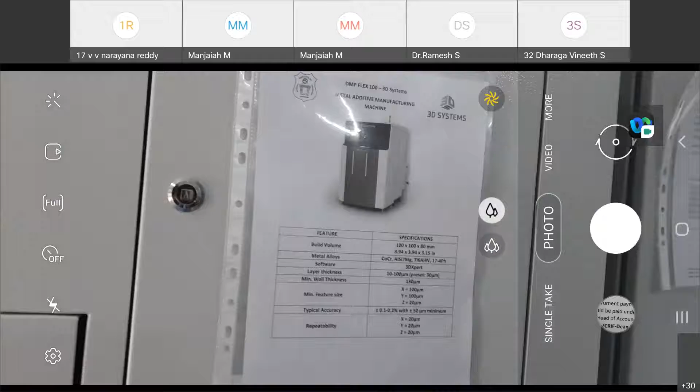So this is a 3D Systems DMP Flex 100 we are having here. The specification of the machine is the build volume is 100. The materials here are aluminum, titanium 6 aluminum 4 vanadium, and 17-4 PH, and the software we are using here for making a part and slicing is 3DXpert. The layer thickness, whatever.

There is some voice issue. Please check it, Rakesh. Last one. Is it? Hello? Yeah. Is it audible, sir? It's fine now. Sir, is it audible? It's audible. Fine. Go ahead.

Okay, so the specifications I already explained a little bit. The minimum wall thickness we can produce using this machine is 150 microns, and the typical accuracy is plus or minus 50 microns. We can produce with the help of this machine, and also we can use any type of material. These are just the 4 materials I mentioned here.

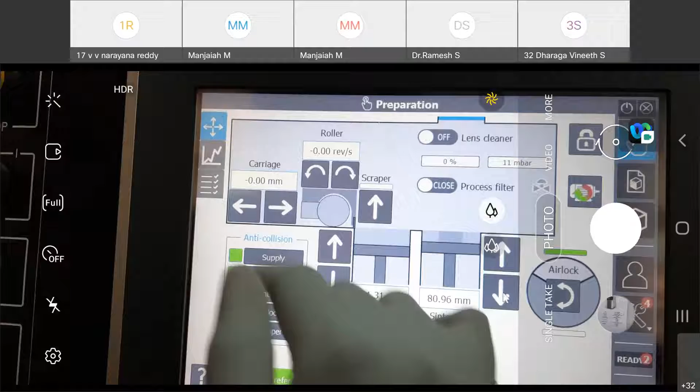Here the green color is indicating that everything is good. If it shows orange or red, it is having some error, and we need to understand and rectify it. All these are the different supply, carrier, centering, airlock, scraper movements specified here. This is the supply piston movement, and these up and down arrows indicate the centering piston movement. All those things we can control with the help of this screen. The screen is very user friendly and anyone can easily operate this metal 3D printer which we are having here.

Now I am going to open this metal 3D printer. This is the lock. Right now it was locked. I want to open this system, so I need to unlock this one. There is a column here. This is unlocked. Now I am opening this machine. This is the opening of the machine.

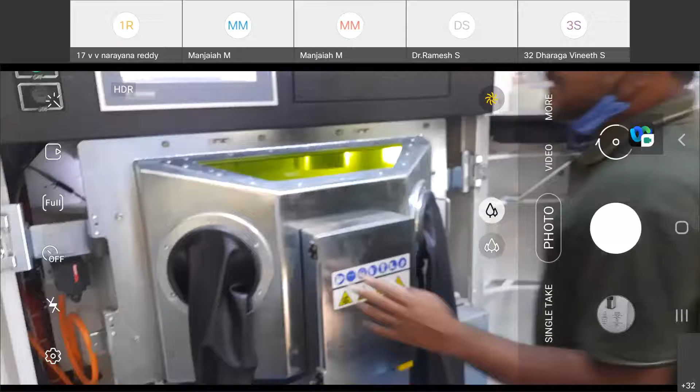Now when you are opening this machine, there is a glove box. The two glove box ports are there. These glove box ports are used to operate inside the chamber. With the help of these glove boxes, we can access the inside chamber of a metal 3D printer, which was shown very clearly. Now I'm going to access this printer.

Before that, I'm opening one more. This is a door we have to send any material. With the help of this, we'll place the build plate, powder, everything we can send through this chamber. We don't have any extra ports. To supply any material or build plate, screws or whatever things are required to operate the inside chamber, those things will be placed inside here, and we'll close this.

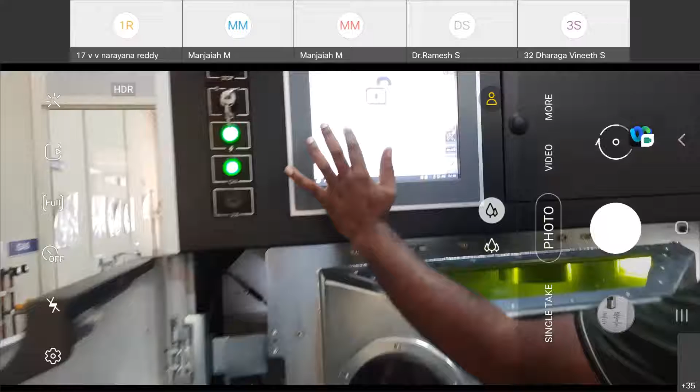Like this, and I'm going to open the chamber with the help of the right side glove port. See, the red color is indicating the door safety. There is a red color here which is indicating the door is not in safety. Left door is open, due to that reason we are getting red color. Because the right door is also open, it shows this red color.

Now I'm going to open the right port. It will come to red color, which means it is not in the safe condition, so we don't need to operate the machine. Now I open the right port. Inside we can see here, it is called a supply piston, where we already poured some amount of powder. That is aluminum 10 silicon powder we are using right now.

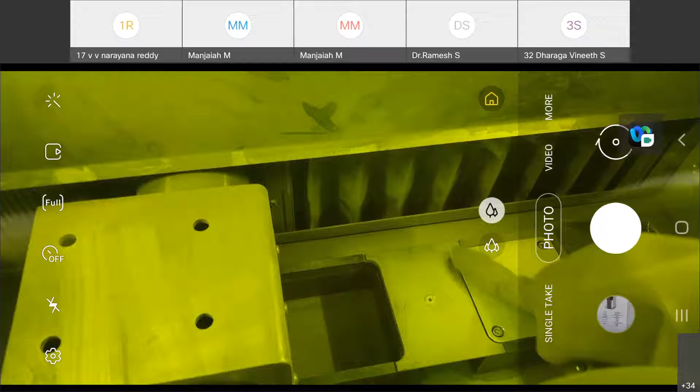And this is a sintering piston. In the sintering piston we already fixed the build plate. Sintering piston means where we make a part. The dimensions of the sintering piston are 100 by 100, 100 mm length and 100 mm, and it has 10 mm thickness. Standard build plate.

Now this is the laser. This is the laser head, which is moving. The build plate is not moving. The laser head is moving here, and movement of the laser head will create a path. From this, we'll get a laser interacting with the sintering piston, and we'll get a path.

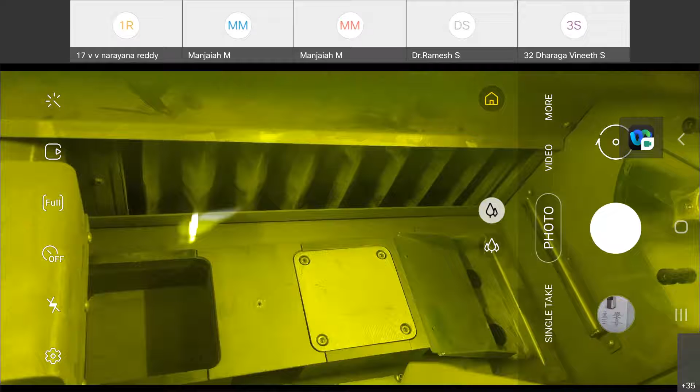Now see, there are two holes. We can very clearly see these two holes. The two holes are used to collect the used powder. When we are making the component, the efficiency of this machine is only around 30%. That means if you want to make a component of 1 mm thickness, we need 3 mm thickness of powder. So the efficiency is 33%, meaning only 1/3 of the powder we are using to melt this part.

Now, like that, the roller. See, this is the roller mechanism. The roller or scraper, we can call it. I already showed you, the screen itself is indicating the roller and scraper. This roller is used to spread the powder.

So here, the purpose of a roller is to spread the powder from the supply piston to the sintering piston. In this machine we are using a roller, and in high-end machines we have a scraper. A scraper is a very simple blade, and the blade spreads the material between the supply piston and the sintering piston.

So instead of a roller, the scraper has a good advantage. With the roller, very frequently we get roller axis errors, which are produced by the roller when compared to the scraper. The blade is the very best. 3D Systems installs the blade on high-end machines, like the DMP Flex 350, which can make a component of 300 mm length and 300 mm width.

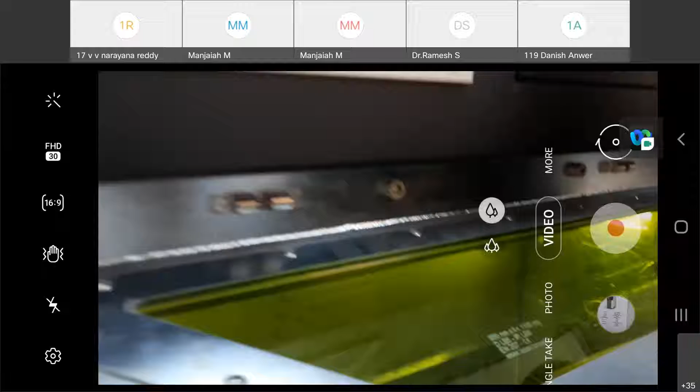Now, before we start, we are going to explore. This is the sintering piston and the supply piston, and we need to make them parallel, both at the same level, because the powder has to be spread by the roller. Now the powder is inside, and there is some gap from the top surface to the roller, some distance below. So we need to bring it up here, and we will spread it from here to here.

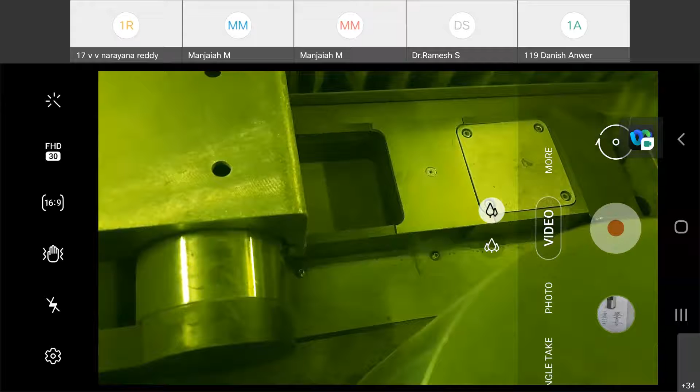Now I'm going to do the actual printing process. I'm closing all this area. We need to clean it, but because of the lack of time I'm not able to clean everything before printing. We need to clean with a brush; we already have brushes inside this chamber, and with them we clean everything. Now I'm closing that, and I'm going to show you the actual 3D printing process.

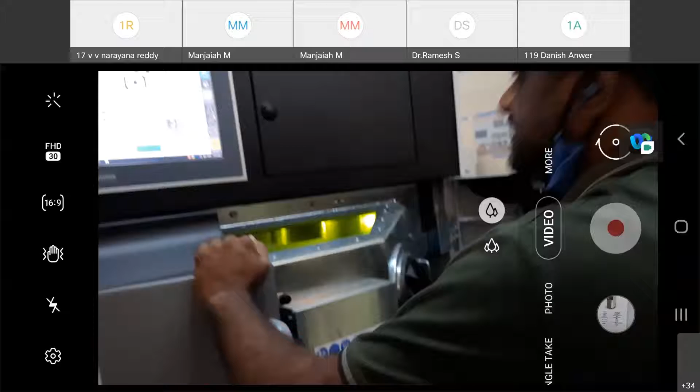Now I just closed it. See here, I closed the right side glove, and that's why we got a green color indication, which means it's in safe condition. Now I'm closing the machine. Now I'm going to access the main window. I'm pressing here; this is the access to the main window.

Now the sintering piston is some distance below, and I want to bring it up. The supply piston is also some distance below, so I'm bringing it upward. Here the downward and upward directions are for the supply piston. I'm pressing here, and now I'm bringing the powder up here. You can see it moving somewhat upward.

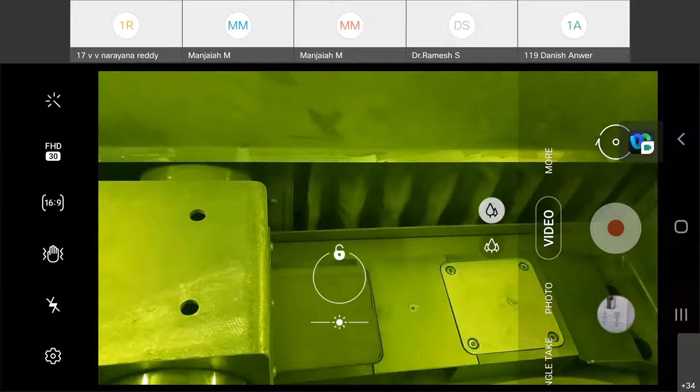Now again I need to move it some 10 upward, so again I am pressing the upward button of the supply piston. Now both are at the same level. You can see the powder from the supply piston and the sintering piston are both at the same level.

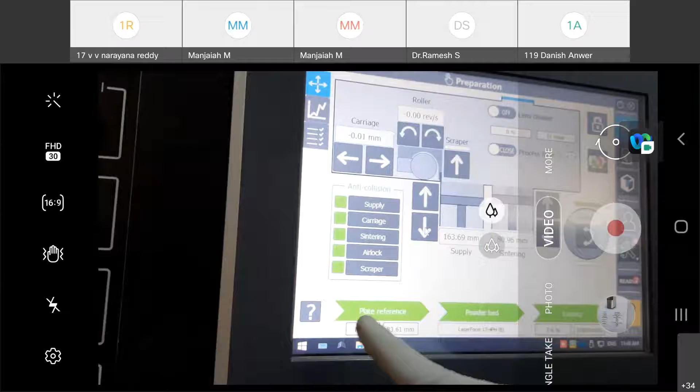There are three steps while making a part using powder bed fusion technology. We call it the powder bed fusion process because we spread the powder with a roller over the sintering piston and make the part. The three steps in any powder bed fusion process are plate reference, powder bedding and inerting. After these three steps, we go for the actual fabrication.

Now the plate reference means we need to set the sintering piston and supply piston. There is a column indicating the plate number, the sequence of the build plate. They will ask whether you are using the standard plate of 10 thickness. We have a plate of 10 thickness, but we don't know if it is exactly 10; it may be 10.1 or 9.99. In that case, this is not helpful.

It's better to always click on this: I'm not using the standard. It is somewhat less because I already used this build plate; it is 9.8 thick. So I'm not using the standard build plate. Now I'm validating. When I do the validation, the supply piston and sintering piston will both come to the same level. Now I'm pressing validate.

Now it is showing missing actuator gas. That means the gas is not open, so I'm going to open the gas. The gas we have here.

So now I open the gas. Gas. Gas. Gas is over. Now I am going to actually change the argon gas which I connected, which was empty. Now I am going to connect one more gas.

So already yesterday night we printed one build plate. For printing one build plate, we need one cylinder, with very high cost, around 3,000, 3,400. For that reason, we did not connect a new gas cylinder. After the completion of one gas, we are going to use the other gas. No.

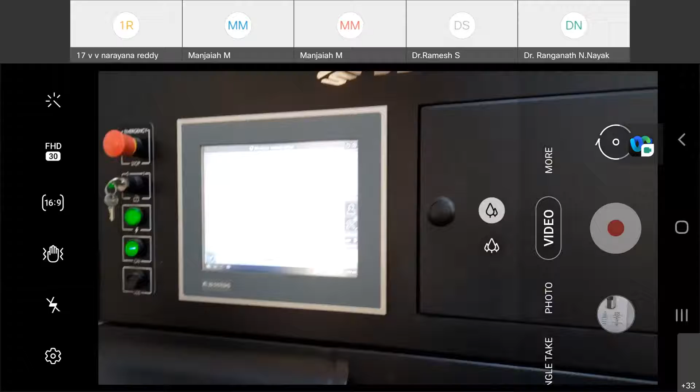We are opening the gas connection. Now it shows the pressure reading. Previously it was showing less pressure. Now it's showing high pressure. Now we are doing the initialization. If any error is there, that initialization is a general step you do before starting. If you do the initialization, any error that is there will be overcome.

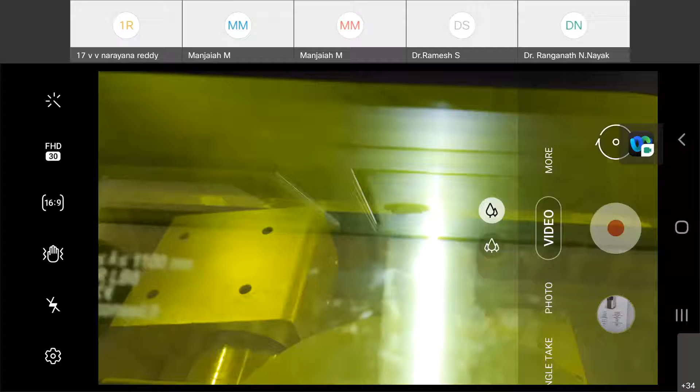So here we can see the roller is moving. That means it's checking whether there is any potential shock between the plate and roller, that means whether the powder is spreading or not. Everything we can see very clearly here. It's doing the validation. The roller is continuously moving. The validation will complete when the build plate is touched to the roller. That means shock.

Oh, okay. Now the next step is, so we did a plate reference. That means the sintering piston and supply piston are at the same level. Now we can see here, both are at the same level. Now we will start spreading the powder from the supply piston to the sintering piston. We will ensure that there is no gap between the supply and the sintering piston.

Actually, right now there is a bed. We can very clearly see that metal bed. That metal bed we need to fill with the help of powder, aluminum powder. Now we are spreading the powder from the supply piston to the sintering piston. For spreading the powder, we are doing an operation that is called the powder bed process.

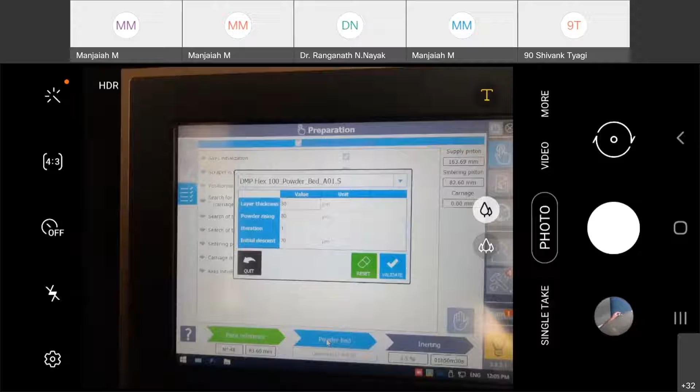So in this step we are showing the layer thickness. The layer thickness means how much powder is spread each time over the sintering piston. That is 30 microns. Now we are rising the powder. Powder rising means that for spreading 30 micron powder, we need to rise the powder 80 microns. Now iterations, how many iterations you need to spread the powder, and these are some technical specifications we have.

Now initially, I'm spreading the powder. For that reason, how many? Now I am using 5 iterations. Starting itself, I started the 5 iterations, I did a set, and I am doing the validate.

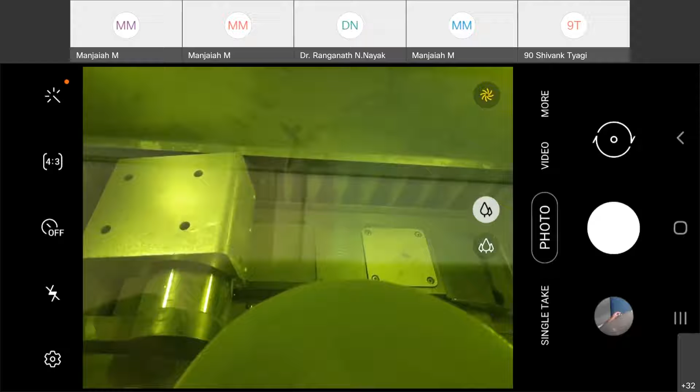Now we can see here very clearly, powder is rising from the supply piston. The roller is moving back. That means each and every iteration, the powder is rising 80 microns. After rising for 5 iterations, the roller is trying to spread the powder. Now it's not audible.

Okay. Now see here, even after 5 iterations the powder is not spreading from the supply piston to the sintering piston. Again we are doing the powder bed option here. Again I am pressing the powder bed option, and again powder rising. How much can I take?

Now I am actually doing 300. Previously 80 is not enough. Again, we can use however much quantity you want. I have taken 300 microns. Again, you can see the operation very clearly here. For each iteration, 300 microns of powder. Now the powder is rising very clearly.

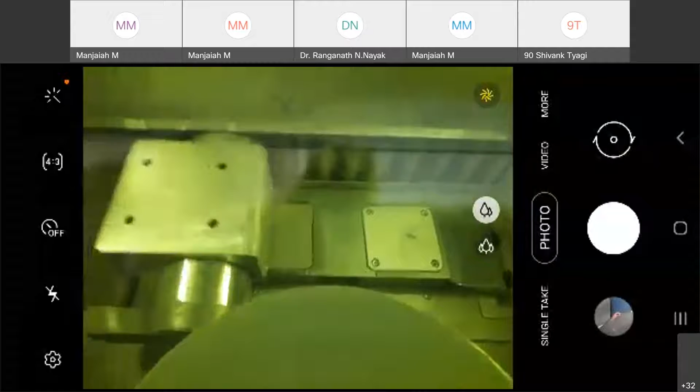You can see that after doing the 5 iterations, powder will be spread from the supply piston to the sintering piston. Now we can very clearly see the roller is spreading. Again, the powder is not spreading. We can see very clearly that there was a gap; the powder particles are not spread uniformly.

Again, I'm doing the operation. Again, I'm taking 300 microns rising of powder. I'm doing the iterations again, 5 iterations. I set both of them, and I'm doing the validation. It is an iterative process, which is not set by default by this machine. We need to do iterations, and after spreading, you can see very clearly here.

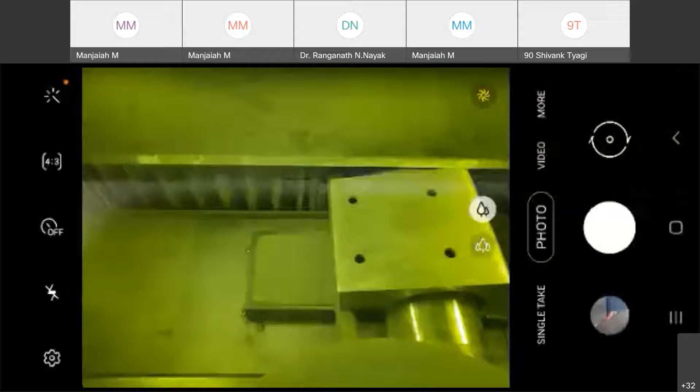Now the powder is spreading from the supply piston to the sintering piston. Now the roller is spreading after 5 iterations. Now you can see very clearly the powder is spreading over the sintering piston. Again, we need to adjust it a little bit. Now I am going to do a smaller quantity of powder rising. I am doing 80. Previously we did 300.

Now we come here to powder bed. Now I am using the default powder rising, 80 microns. Already a heavy powder layer is spread over that. I am taking 30 microns. I am going for only 3 iterations. 3 iterations is required; I am not wasting the powder. I set the 3 iterations, and I am doing the validation.

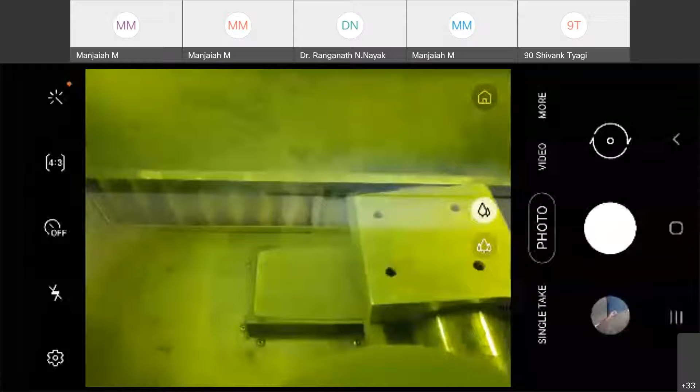Now you can see here again 80 microns of powder is rising from the supply piston and collecting over this bed, and the roller is spreading it over the sintering piston. Now the powder is spread uniformly. You can see very clearly that on the build plate surface, powder particles are spreading.

It is transparent because aluminum is a light powder, and it is also only 30 microns, a very small quantity. That is a 30 micron layer of powder spread over the sintering piston. Now there is no gap between the sintering piston and the supply piston. The entire build is covered with powder particles. Now the powder bed stage is also completed.

Now the next step here is inerting. Before that, it shows: please be sure the lens is cleaned before going to inerting. That is a very important step, the lens cleaning. Now I am going to open the lens.

The laser we are using here is an Nd:YAG fiber laser. This is the entire laser assembly. It's very clearly marked laser aperture. Now I want to open this laser head. This is very easy to operate. I'm opening the laser head with the help of an Allen key.

So now, with this Allen key, I'm opening it. So this is open. It was locked. Now to open this, I'm lifting. Now I see this is the laser lens. I want to clean this laser lens, so I'm cleaning it.

I'm cleaning with acetone, not with water or anything else. Here we can clean with acetone or ethanol; both can be used for cleaning. With the help of a paper towel, I cleaned it, removing the dust. So we cleaned the lens.

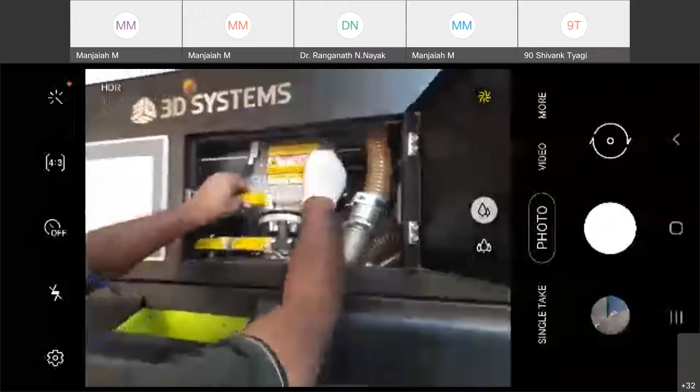Now after cleaning this lens, we need to close this. For closing, there is a lock; it was already locked, an automatic lock. I unlock this head and I'm closing it. The lens is clean. Now we need to lock it again so there are no disturbances during fabrication. And so it was locked. This is the complete laser head system. I'm closing it. Now we go back to the main window.

Now see, this is the inerting option. There is regulation on. When you press regulation on, gas is supplying. Now here we need to set the set point, the ppm level. By default, the set value is 1000 ppm for printing any material we use here. That is the default level required to make any metal 3D printed part.

The set value I set here is 1000 ppm. Right now inside the chamber there is around 80,000 to 82,000 ppm of contamination. I need to bring it down to 1000 ppm. For that reason, I am doing the inerting. Inerting is creating a vacuum inside the chamber.

Okay. So here now I am pressing the inerting option. Now inerting option is over. So I press the inerting. Now the gas is flowing. Previously it was very less quantity. Now it is showing 27.3 liters per minute. Now gas is flowing to the chamber.

Now it's showing the estimated time around 42 minutes 54 seconds. That means this amount of time is required to get inerting. So still we have to wait up to getting the 1000 ppm only. So for this much time we can't wait here.

Now we will explain you the part fabrication. So here if you want to make a print, we need to make that part with the help of the 3DXpert software. Now Mr. Lokesh sir from Shree Rapid will explain you how to make a part and how to make a FAB3 file for printing on this machine. We need to make a FAB3 file. That FAB3 file will be created by Lokesh and he will explain using the 3DXpert software here. After completion of the 3DXpert software, I will tell you the remaining post processing and fabrication area.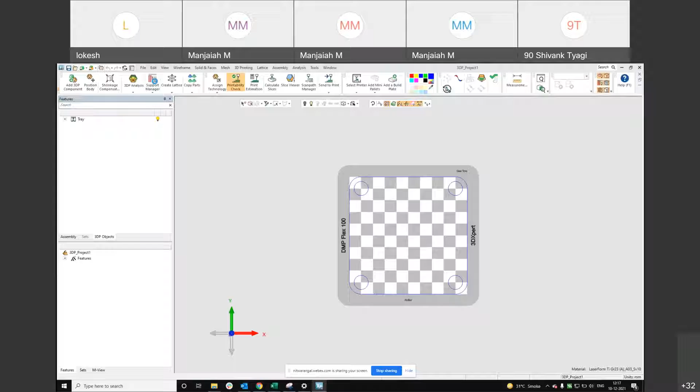So let me show you the basics of how 3DXpert works. So first we select the platform. I'm selecting a project now, like any other normal software. The options that you see in the topmost part of the tab are some 3D printing options, and here you see the DMP Flex 100 build plate. This shows what area you can work with.

There are multiple printers. So first we select the printer depending on what printer we have. This software is compatible with all the 3D Systems metal printers and EOS, SLM, Renishaw printers. Today we will only be looking at DMP Flex 100. So this is my printer. Then I select the size of the plate. You can also define your own size of the plate. You can't increase it obviously, but reduce, you can definitely do it.

So let me tell you why people try to reduce the build plate. In case you are printing some part that will be machined later, normally they reduce the build plate. For example, I can have a 50 by 50 plate. I'll print the part over it, heat treat it with the plate, machine it along with the plate and then remove it from the plate.

Normally in CNC machining, if you want to hold the plate in the chuck, you need a hard solid part because it's going to apply some pressure. If you apply that pressure on the part, for example an aluminum part, there's a chance of deformation, or the part which comes in contact with the chuck can wear out. For that reason, you can reduce the build plate size.

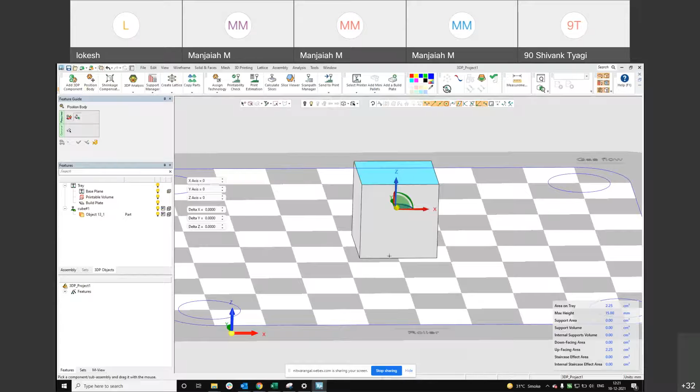But the thing is, first I need to give a height, a z height for the part, for the cube. Because in case I'm printing the cube just on the plate, then I have to remove the part from the plate, either by wire EDM or bandsaw. So I'm going to lose a part of the cube that actually is required. So the first and foremost thing we do in positioning is we increase the height. If it is a wire EDM, then we normally give 1 mm. If it is a bandsaw, we give 3 mm.

So you can see I've increased, and below you can see the red region. The other faces are of different color. Only the bottom region, which is called the down facing surface. So red means it requires supports at that region. There'll be different color codes depending on the geometry. So you can see for up facing, down facing, that is 30 degree. Anything 30 to 90 degree, it will show in yellow. So that's your overhang. We are mostly concentrating on the overhang region, because that's the region where you need to give support.

Okay, so I can even change this depending on my requirement, but the default set for DMP 100 is 30 degrees. For other 3D printing, you can see, it is 45 degrees. But for DMP 100, the reason why we are using only 30 degrees overhang angle is because of the roller. The advantage of having a roller is it compacts the powder properly, so that the overhang angle, which is 45, is reduced to 30. So that is one of the biggest advantages of the printer.

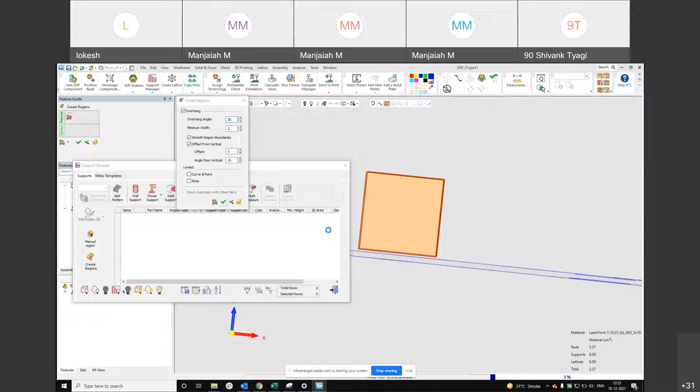So once we orient, I've clicked OK. So I've selected the position. Then we have support manager. So once we import the part, orient the part, position it, then we have to support the part, because it cannot print just on a powder surface. So even here you can see the overhang angle is 30, and I click OK. So it creates a region depending on your input, and gives the region for supporting.

So you just need to click it, and for supporting you have multiple options. You have a solid support, you have something like a cone support, you have wall support. So normally in case you are going for a wire EDM, and if it's a complete solid surface, we normally give a solid support. So you can see this is how the solid support is. And whenever we give a solid support, we make sure we give something like a radius.

The reason for giving this radius is because 3D printing produces a lot of residual stress, and if I'm giving a sharp corner, like what you see in this, there's a sharp corner between the plate and the part. So due to residual stress, there are chances the part might warp in this region. So that's the reason why we normally give a skirt, so that the residual stress is low and the heat dissipation is proper, and it doesn't fail during the printing.

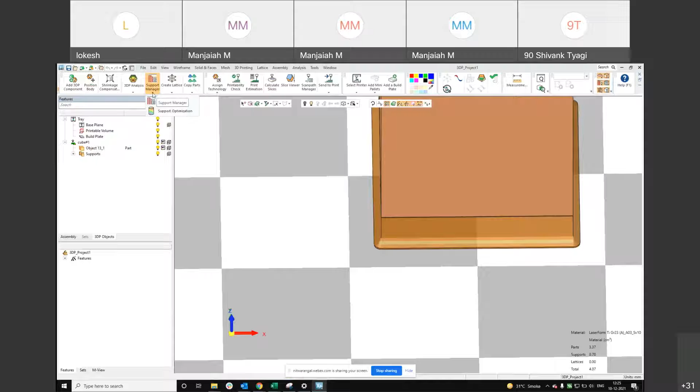I can delete the support. So all the options here for supporting are parametric, something that users can define by themselves. So you can see that the pattern is changing here, and even give fragment boundaries.

So once I've created the pattern, I can create the wall support. So this is a wall support, and even these are parametric. You can change the height or the distance of the support. So you can see, I can change the intersection length, I can change the height, the piercing height. If you want to give a solid base, it's possible to give a solid base.

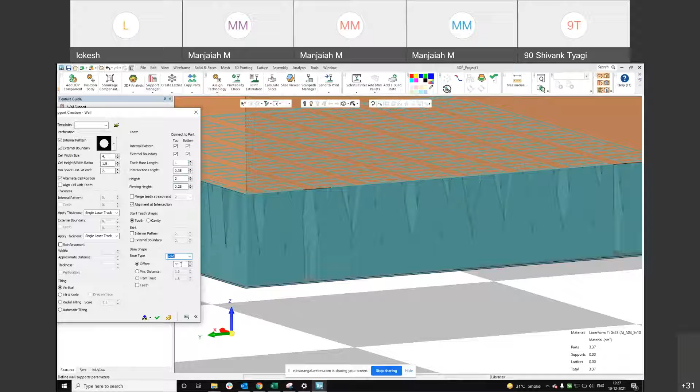I'll give it from the tray. So you can give a solid base as well. Or for easy removal, if you want to give a teeth kind of surface at the bottom, it's possible too. And if you want to give a thicker outer boundary, you can give only the thicker outer boundary for the part to properly hold to the base plate. So these are something that is possible.

I'll delete the pattern. There's also an option where you can directly save a template. So this is something that we have already defined and saved. So you can click on the drop down. You'll get different templates. So I'll use the wall support template for this. So I've created the support just by a click.

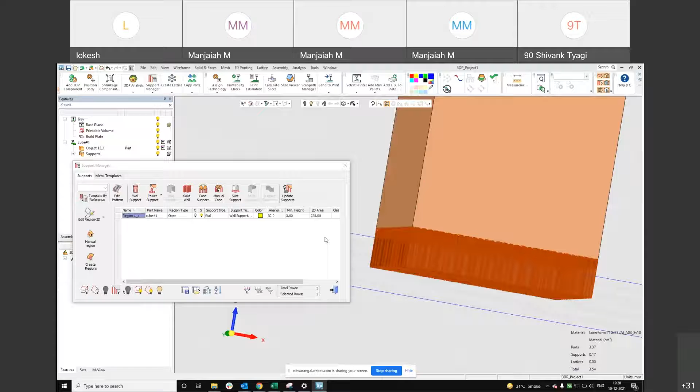So different types of support are used for different geometries. So for normally cubes, a solid support is enough. I'll just create a solid support. Sorry, also. So once I have finished creating the support, the next process is slicing.

So the reason why we have slicing, probably you will be aware that slicing is required because 3D printing is a layer by layer process. So the machine needs layer by layer information. So depending on the layer thickness, it depends on the printer, it depends on the software, or it depends on the parameters that you normally generate. So you can slice the part accordingly. So slicing, you have something called calculate slice.

So here you can see I have two regions. One is the actual part, the object, and the next is the wall support. So for both, I have different sets of parameters. For the part, because it has to be completely dense, and the mechanical property also should be good, we have a standard parameter.

For wall support, anyway, it's going to be a waste. So we are going to remove it, break it. So we don't want to spend too much time scanning that support. So that's why wall support has a different set of parameters where it can scan it very fast. So in scanning, you have different options as well, wherein you can define your own parameters. So you have contour parameters, you have hatching parameters.

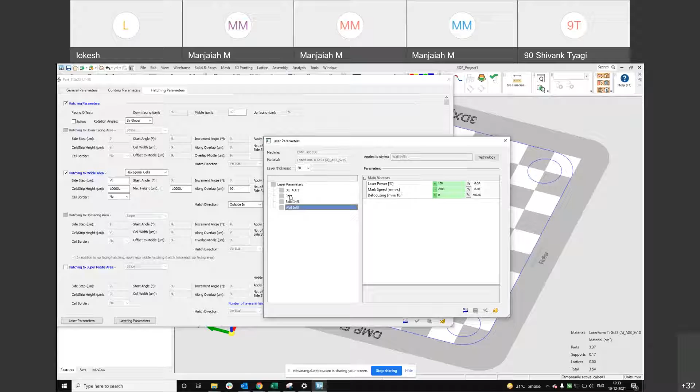So this is for the part. So I'm using 100% laser. This is in percentage. So we are using 100% laser, and you see the scan speed is 800. So for wall for support, you can see the scan speed is 2000. I'm using the same power, but my scan speed is almost double what I'm using for the actual part. So this is, as I told you, to not waste too much process time in printing the supports.

So these are the parameters that you can play around with. Normally for universities, for developing materials, this tool is a very useful tool for them. So I've explained that, and now I'm going for slicing. So now it calculates the slice. In this, the layer thickness is 30 microns. So it's going to slice 30 microns each layer.

So normally slicing takes a little bit of time depending on what file you are using, whether it's a CAD file or an STL file. If you are well aware of 3D printing, STL is something that you frequently come across. So this software not only can work with STL, but it also can work with native CAD files. Any input from SolidWorks, CATIA, any existing CAD tool. So you can directly import, work on that, and then you can print it.

So this is really helpful when you're doing DFAM or generative design, where you keep frequently changing the design and see the printing capability or feasibility. So this is something that's very useful. So once slicing is done, you can see the slice viewer. It gives you the layer by layer information, how the laser travels.

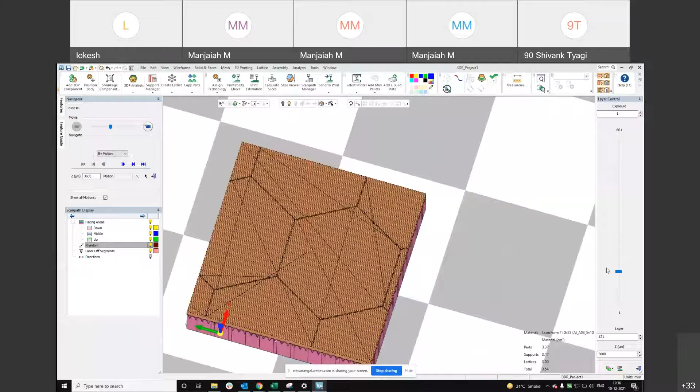So you can see we have given the hexagonal pattern. You can see it's hexagonal, and you have a stitch here where one hexagon and the other hexagon stitch. If you're changing to a stripe, then you'll see a stripe picture. So once this is finished, if you want to print one part, yes. If you want to have multiple, there are two options. One is copy parts and the other is nesting.

In 2D nesting, you give a minimum distance. I'll give 5 in this case, and I want to print the maximum cubes that is possible. So it automatically calculates depending on your orientation and nests it automatically. Also, you can give a maximum number. Say if I want 10. So it nests accordingly.

So normally when we are doing DOE kind of stuff, you have a different set of parameters for each cube. In this case, we have a standard parameter for all the cubes. But in case you want to change the parameters, you can obviously change it. In the same build, you can have different parameters, and then you can print it. So exactly the same way as I showed you. Once this is finished, you can save it, and you have something like send to print.

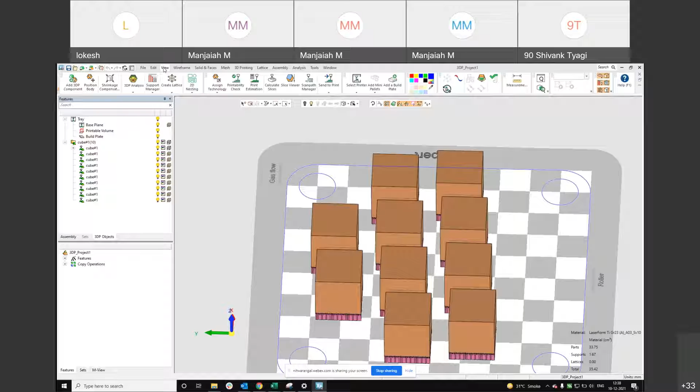And there are options where you can label the parts as well. After printing, you need to identify the parts. It's also possible. Sorry. So I click on volume text. So I can number the parts from the fields.

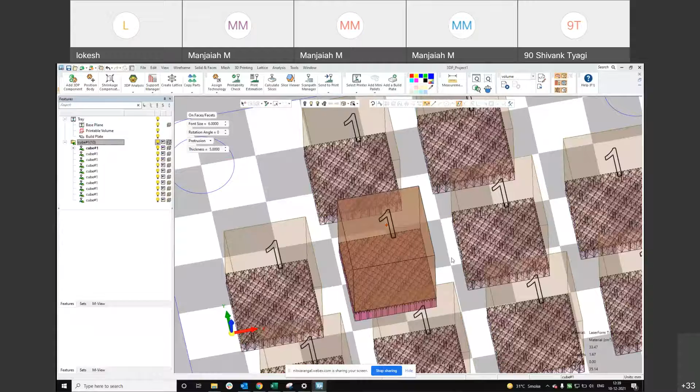So since I've created the same part, it's highlighting all the parts. If you're creating individual parts, then you can label each individually. I can even change the font size. So I've engraved it. You can also do it the other way. So this is an engraving. You have protrusion, sunken protrusion. So I can even print something on the tray. The protrusion. I can change the height as well.

So once this is done, I'm sending the part for printing. It saves the whole file with the slicing option in a format readable by the printers. Different printers read different formats. For DMP Flex 100, it's a FAB3 file. You can directly send it to the printer through a LAN or use a pen drive, put the FAB3 file and start the build as Narayan was explaining to you previously. So that's it about 3DXpert.

So that's it from my side. Okay, sir, is it completed? Yes, Srikanth, it's completed. Yeah, thank you, Lokesh, sir. So, okay,

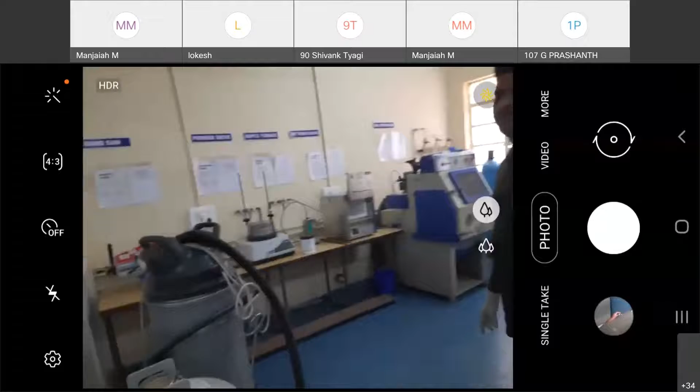Now these are the various equipments we are having: bandsaw, power shaver, muffle furnace, shot peening. So these are the various post processing units, and I will tell you one by one. Now see this. This is the part which was printed yesterday. Again, the same part we are going to print right now. The same part we are doing the post processing.

Here, this was printed. So we are printing here now. See, if you see the surface here, there is unsintered powder particle which is sticking onto the fabricated parts as well as the build plate. Now we are removing this unsintered particle with the help of a vacuum cleaner. This is the vacuum cleaner we are having here.

With help of this, I switch on this vacuum cleaner. Now I'm taking off the unsintered powder particles. So we are operating. Now, so we remove all unsintered powder particles from the surface of the build plate this way.

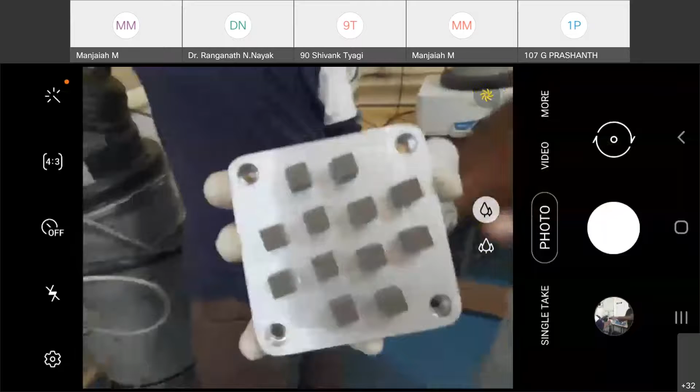Now, see, this is the build plate. This is a fabricated part made by using this machine, and we removed the unsintered powder particles. And also this is the surface, the smoothness of the surface finish. Now again, we will improve the surface finish of this fabricated part by using the sand blaster we are having here. With the help of the sand blaster, we can improve the surface finish of the metal additive manufactured part.

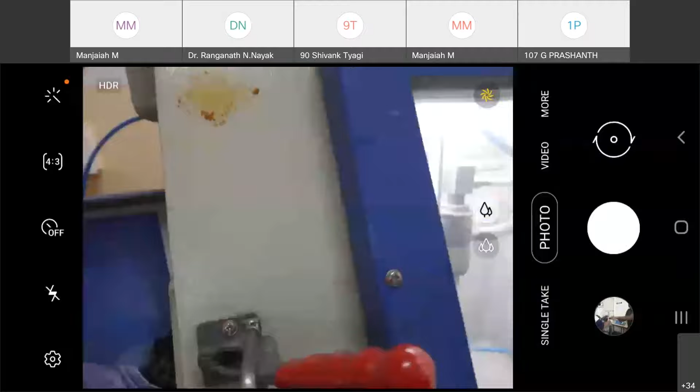Now I am opening this sand blaster. This is the chamber. Inside the chamber, I am placing the fabricated part, and I am closing this. Now we are operating this. Now inside we can see here. Okay, I will switch on this. So like this.

So with the help of a glove port, we are having two glove ports here, we can just take the part. This is a compressor nozzle. From this nozzle, we'll supply abrasive particles. As abrasive particles we are using aluminum powder particles, and the blue color is indicating compressed air. Compressed air is coming from the blue color pipe, and abrasive particles coming from this white transparent pipe.

So here abrasive particles as well as gas both are coming with help of a converging nozzle, high compressed air along with abrasive particles. We can see here abrasive particles coming from here, as well as compressed air, which is hitting the surface. So like this. When it is hitting with a high impact load, the surface finish is improved. It induces a compressive load on the surface of the part and improves the surface finish of this part.

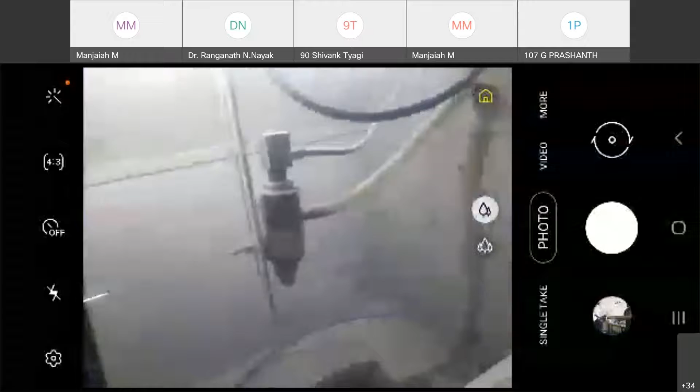So like that, the process will continue until getting a good smooth appearance of the fabricated part. So with the help of the sand blasting, we can improve the surface finish of a part. Now I'm not doing it continuously. I'm removing the part from the chamber, and I will show you. So this is the part. Actually, we have not done it completely. It will take around 10 to 15 minutes.

I just demonstrated. Previously it had a complete gray color. Now it is having some white appearance there. That means unsintered particles were removed with help of high compressed gas as well as abrasive particles. Whether the surface finish is improved is measured with the help of surface roughness measurement equipment only. Then only we can identify whether it is improved or not. Obviously, it will be improved when we measure.

Now, next, because of the laser additive manufacturing process, high residual stresses will be produced in this fabricated part. So before going to application, we need to remove the residual stresses which were produced during this metal additive manufacturing process. To remove the residual stresses, we are using the muffle furnace here.

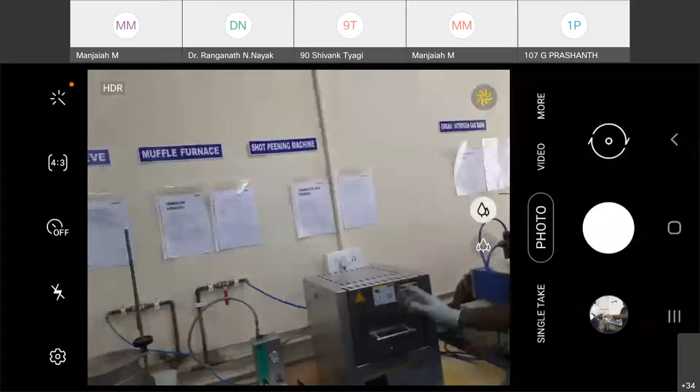Generally, the heat treatment process consists of 3 steps, as we know: heating, soaking, and cooling. Now, I am taking one of the parts just to show how we do it. This is a fabricated part. This part will be placed inside this chamber, and I'll switch on this machine. So I switch it on.

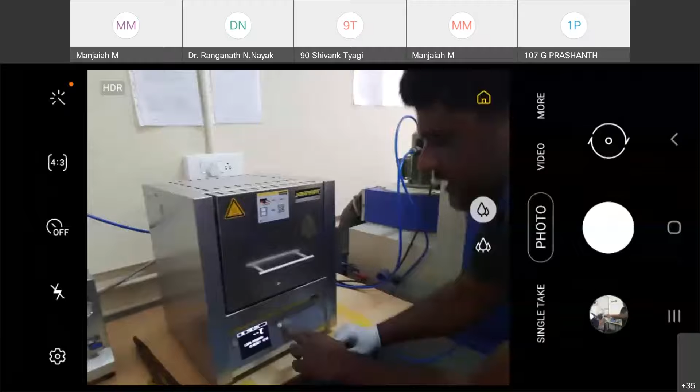After that, pressing here, it's a very user-friendly furnace. This is the display, and these are the controlling options. See, this is the program. Program start, we can press start. The display shows P01, meaning program, and S01, the segment. Generally, we have 3 segments, that is heating, holding, and cooling, and all these processes are very clearly displayed.

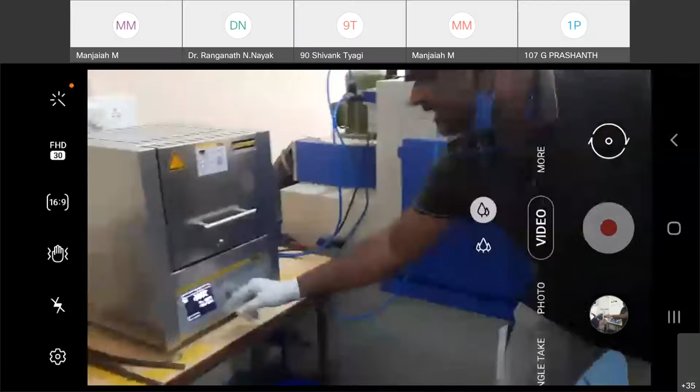Now, if I want to change this program, this is the controller. Pressing this controller, we can change the program. From the research point of view, it is very useful for the heat treatment process. We can change segment 1, segment 2, segment 3, and control the temperature of these 3 segments. Like that, we can change the temperature and everything according to your research. This is the furnace we have.

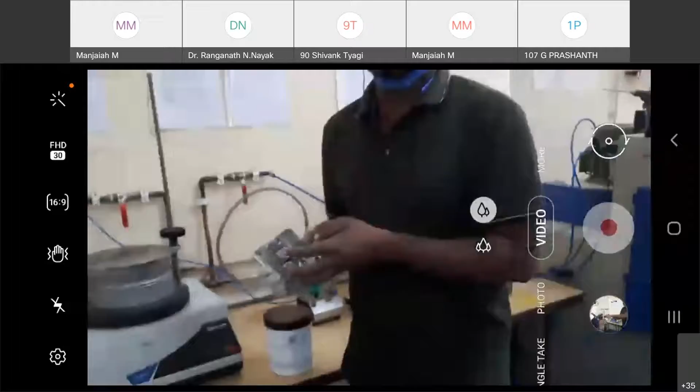After removing the residual stresses with the heat treatment process, I need to remove these parts from the build plate. Generally, as Lokesh sir said, we print a component with support structures which can be removed very easily. Those support structures are removed with a simple bandsaw we have here, used to remove the parts from the surface of the build plate. This is the head, and this is the build plate. We fix the build plate to this head and remove the parts.

So like this, it is very easy to operate. These parts are removed from the build plate like this. This is the bandsaw generally used to remove the parts.

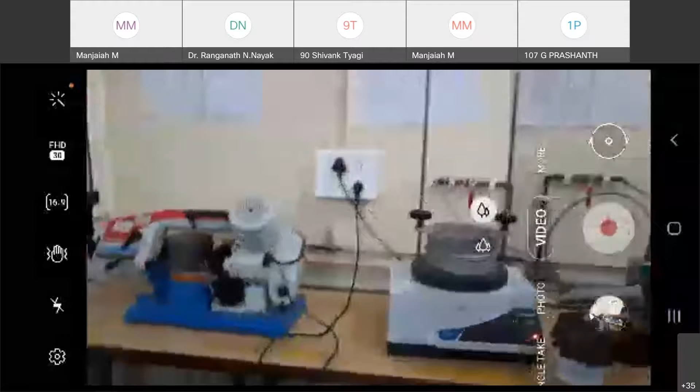The next important equipment we have here is the powder sieve, which is very important in the post-processing section. Why? Because, as I told you, the powders used in metal additive manufacturing are very high cost. Due to that high cost, we reuse these powder particles again and again. So this is the powder.

So here is the sieving machine. In this machine, there are 2 chambers or plates, a lower plate and an upper plate. In the upper plate, we place the powder. This is the powder which will be placed inside the upper chamber. After placing the powder, we tighten this.

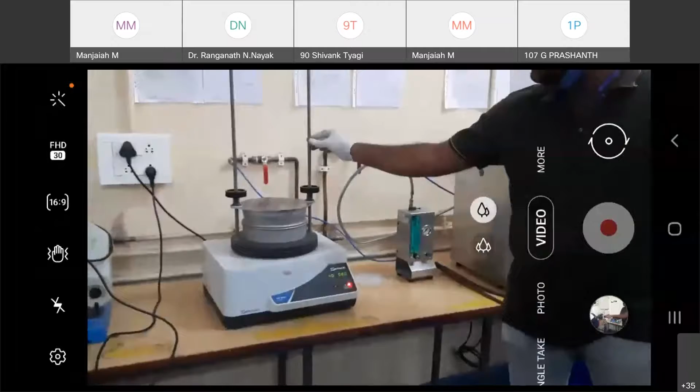Now, here we'll place this unsintered powder particle into the upper chamber. The main operation of the sieving here is we require a vibratory motion. For vibratory motion, we need to set the time of vibration and amplitude of vibration. I am setting here some time and amplitude of vibration. I press the start.

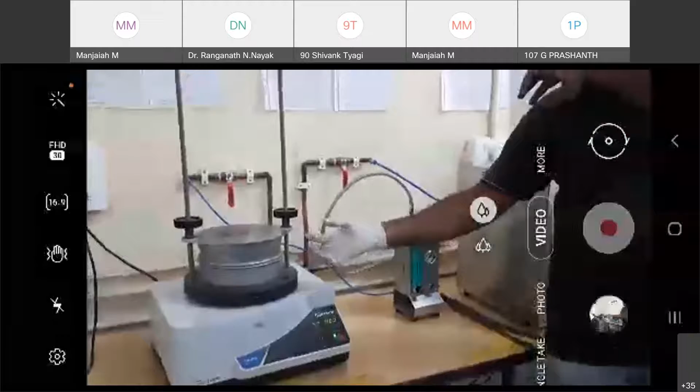Now the machine is vibrating. It may not be audible to you, but it is vibrating with an amplitude. I placed some plastic plate, which is moving due to the vibratory motion only. Due to the vibration, the unsintered powder particles will be cleaned, and we can get this powder below this chamber. Below the chamber, we can collect this powder, and this powder will be reused.

For reusing any powder particle, we have to use the powder sieving. So I'm stopping here now. This is the powder after completion of this process. This is the powder which was collected, just a small amount of reused powder. If you want to use that reused powder again in the metal printer, that powder particle will need to be treated.

After collecting the reused powder, we need to put it in the oven. Why are we keeping the oven here? Moisture or any other particles present on the powder, we need to remove that moisture content. For removing its moisture content, I am placing it into the furnace, and I will do some heating. I will preheat the powder to a certain temperature. Generally, I am taking 80 degrees here.

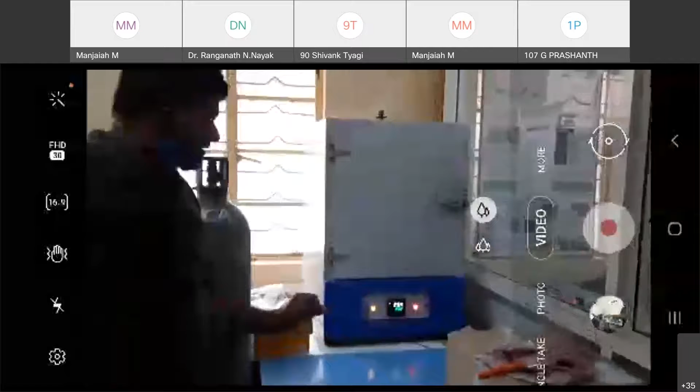This green color is indicating the target temperature. White color is indicating the present temperature inside this oven. After reaching 80 degrees centigrade, I will preheat according to our requirement. Right now, we are using 8 hours preheating of the powder before inserting it into the machine. According to your requirement, you can preheat the powder and reuse it again and again.

So the main process of used powder is here. The sequence of reused powder: generally we collect the powder from the 3D printing machine, that powder will go to sieving, and after sieving we keep it in the oven for a certain time period according to your requirement. Again, this powder goes into the machine for printing.

After printing, we will clean the build plate with the help of a vacuum cleaner. After vacuum cleaning, we'll do the heat treatment in the furnace for removing the residual stresses, and then we'll cut this part. This is the sequence generally we are following here. These are the various equipment. Now we'll move on to the actual printing of our part.

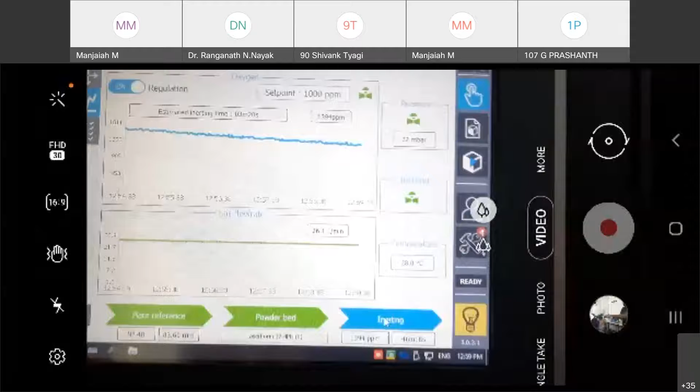See, again 3 minutes of time is showing. Actually, it is not a default time. It's because the filter is on, so each time the time is increased. It's not the original time showing here. Again 300 ppm. The set point is 1000 ppm. Again 200. It needs to come down to 200 or 300. It's fluctuating. It's taking 2 minutes only.

In the meanwhile, in these 2 minutes, if you have any doubts regarding this, you can ask me and I will clear them. Only 2 minutes of time is there. After that, we'll start printing. So before that, now we move on to the file.

Shivank? Am I audible? Okay. Yes, sir.

So, dear participants, we are almost at the end of this lab session. We are removing the oxygen from the build chamber. That is what this 1000 parts per million is. So this is almost the set point.

So you can see these are the cubes we are giving. These cubes are located on the build plate as per the design guidelines. So you can see the number of layers is 367 layers. We are going to print, and this is the first layer, and it is a solid surface.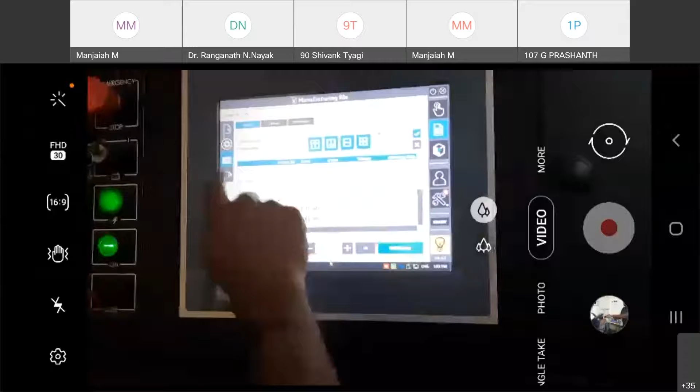We want to check the part display, so you can see the hatch patterns are also visible here. Maybe not. It's okay. You can see here. Now this is the manufacturing panel. In this manufacturing panel, we can see the progress from here, and this is the project information: the number of layers, and the estimated powder height.

If we pour a less amount of powder inside the supply piston, the machine will automatically warn you that the powder is less, so we can't go further. So before starting the printing, it will tell you. We have a facility like that; the instruction comes from this system. The software is like that. So first, the number of layers is 366, and we need to layer and then sinter.

Let me remind you of this powder bed fusion principle. We have what?

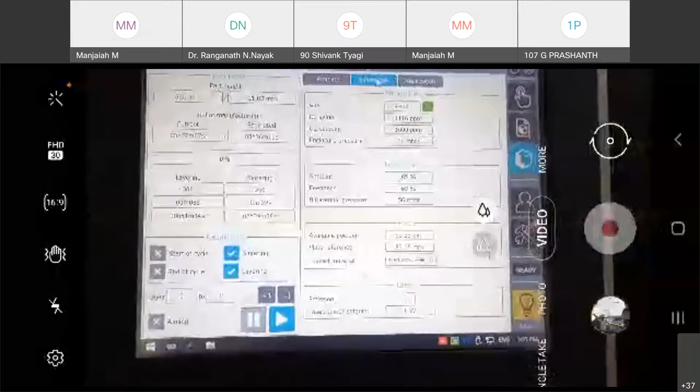Is this video clear? Dear participants, anyone can respond. Unmute yourself. It looks like a blur. Getting blur, sir, some sort of blur. Yes. We are almost at the end. Yeah. Fine. That manufacturing table may not be visible. Okay. It is glaring actually, that reflection is coming. Yeah. Still, I will guide you here. It is not much. I will inform you here.

So this is the manufacturing panel here. You need not begin this, but we'll keep it here. So now you can see how our process is going on. The left side is the supply piston and the right side the build plate, that is the sintering piston. The layering is done by this. So now I will start the cycle by layering.

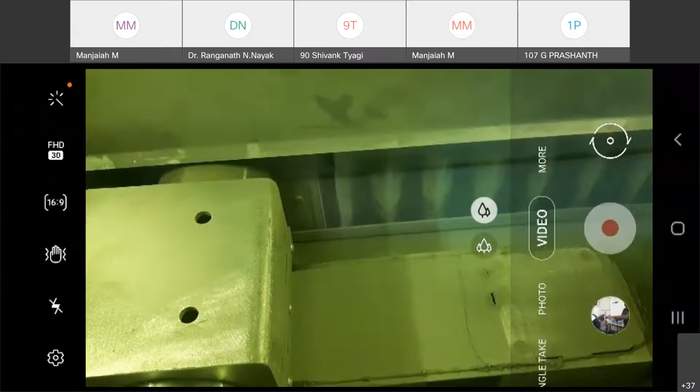So the process was started. I initialize it. First I will click on the layer. After that, the sintering is started. Now the laser is etching on the sintering plate. Now you can see the laser spot diameter. It's 80 micrometers. Because of this continuous path, you can see a path.

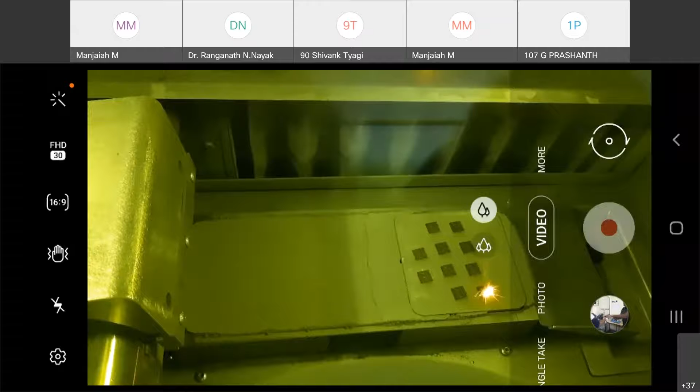We are using this aluminum powder and it has an energy density around 60 joules. Okay. Energy density is an important factor in this. So for the initial layers, we need to go for double sintering, because heat accumulation happens in this part, so residual stresses may generate, and due to that, delamination happens. So for the first 5 layers, I need to go for double sintering.

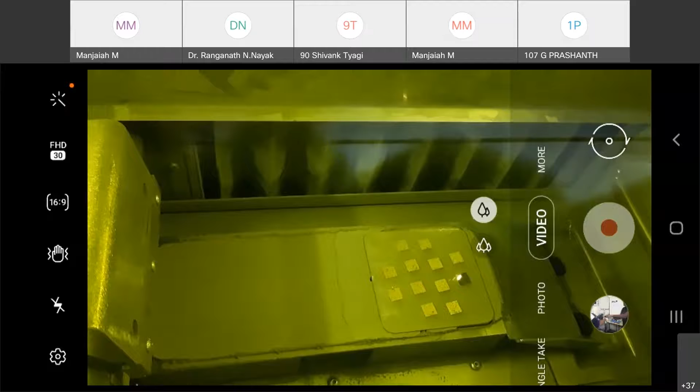So this is the double sintering. You can see during the first sintering, the spattering. Spattering means while sintering, the spatter will come out, unwanted particles beside the laser scanned part. Those spatters are very less during the second scan, but very high during the first scan. We should note that. Okay. Later, we need to go for the

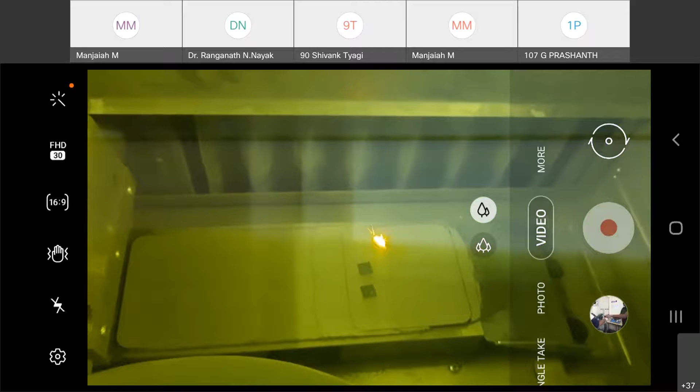second layer. The roller spreads the powder. Now that is the spatter. During the first layer sintering, the spatter is coming out very high.

Now this is the second layer, double time I am giving. So this is double sintering. So the spatters are not very high during the second. Why do we focus on these spatters here? These spatters are the main cause of porosity, roller obstruction and residual stress. So we need to minimize them. Layering the third layer, then first sintering.